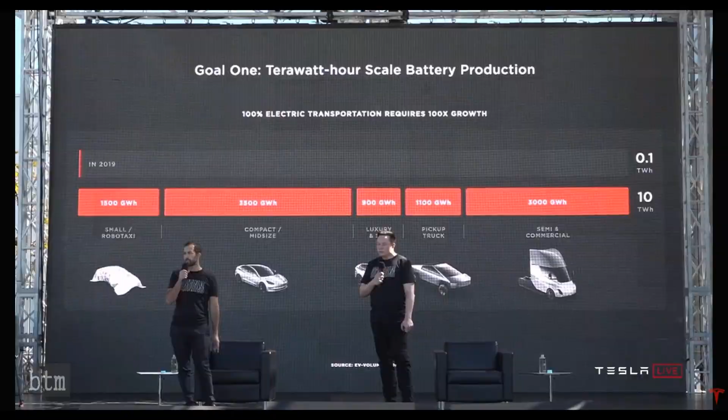You can see we're talking about 100x growth in batteries for electric vehicles to achieve this mission. And we are going to get there - it's just a matter of how fast, and our intention is to accelerate it.

You basically need on the order of roughly 10 terawatt hours a year of battery production to transition the global fleet of vehicles to electric. And the average vehicle lasts 15 years, so we're talking about 150 terawatt hours, give or take, to transition all vehicles of all types to electric. So it's a lot of batteries, basically.

Then on the grid side, we have a similar mountain to climb - 1,600 times growth from today's grid batteries to go 100% renewable on the grid and to take all of the existing fossil fuel heating uses in homes and businesses 100% electric.

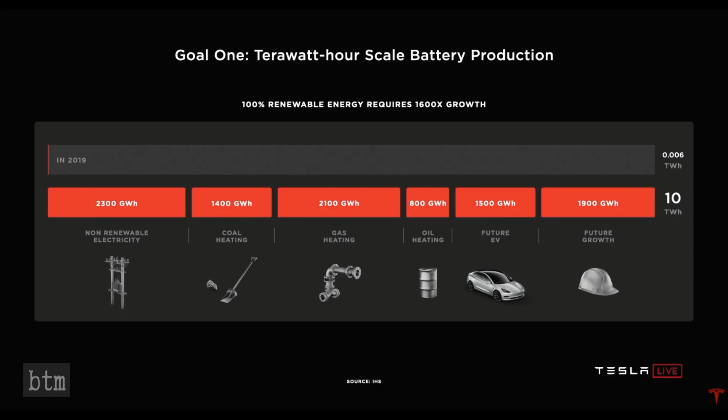This number, I think, might grow even more, as the world economy matures and as countries with high populations industrialize - we could see this number be even more. But let's say it's roughly 20 to 25 terawatt hours per year, sustained for 15 to 25 years, to transition the world to renewable. This is a lot.

So today's batteries cannot scale fast enough. They're just too small. For Giga Nevada, 150 gigawatt hours per year is probably what we expect to make out of there, but this is really pretty small in the grand scheme of things - that's only 0.15 terawatt hours.

And they cost too much. We would need 135 fully built out Nevada gigafactories to achieve 20 terawatt hours a year. It's not scalable enough of a solution. We need a dramatic rethink of the cell manufacturing system to scale as fast as we can and should.

And I think we should view this as more than just a question of money. Money is sort of like an ethereal thing, but it's really the amount of effort.

You have a certain amount of effort, in terms of people and machines, and depending on how efficient that effort is, for a given amount of effort, you want the most amount of batteries. It's not just a question of if we had $2 trillion, tomorrow you could make this. It's not that easy. You actually need to organize a massive number of people, build a lot of machines, build the machines that make the machines, and it's incredibly important to have that effort yield the most number of batteries.

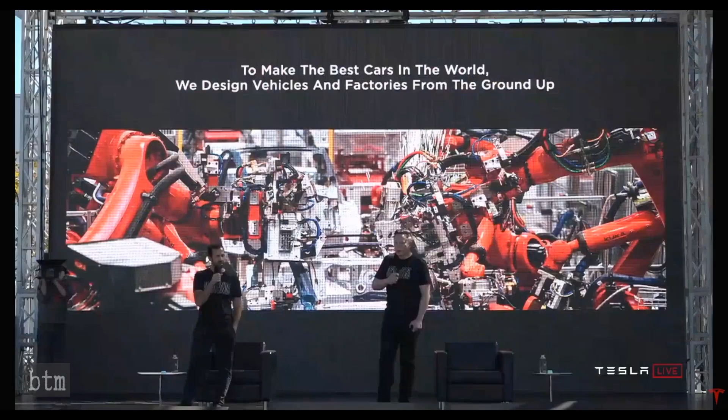To make the best cars in the world, we design vehicles and factories from the ground up. And now we do this for batteries as well.

It's weird, the slides don't show up quite right. Anyway, what shows up on the screen is not quite what shows up there. Oh, okay, it's different. I think it's because that's, yeah. No, that one's current, supposed to be current. Anyway, so let's get started.

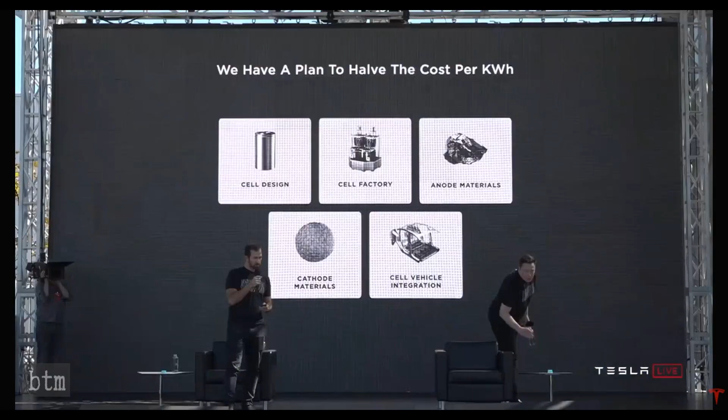We have a plan to halve the cost per kilowatt hour. And it's not a plan that rests on a single innovation, some research project that'll never see the light of day. It's a plan that has taken creative engineering and industrialization across every facet of what makes a cell into a battery pack, from raw material to the finished thing. We're going to go through that plan with you today, step by step, and build up how we get to these goals and how we accelerate this transition and make our vehicles and our grid batteries more affordable.

We basically thought through every element of the battery, well, almost every element. There are a few more elements that we won't get to today, but we will get to in the future. So first, before we get too far into it, let's talk about what is in a battery cell.

We've got the cap and the can, negative and positive terminals of the cell. When you open that cell, you've got a tab connected to those terminals, what we call the jelly roll, which is the wound electrodes on the inside. You can actually see what this looks like as you unwind it. This is over 1 meter long in a typical 2170 cell. So it's quite a long winding process. And you can see the tab still there.

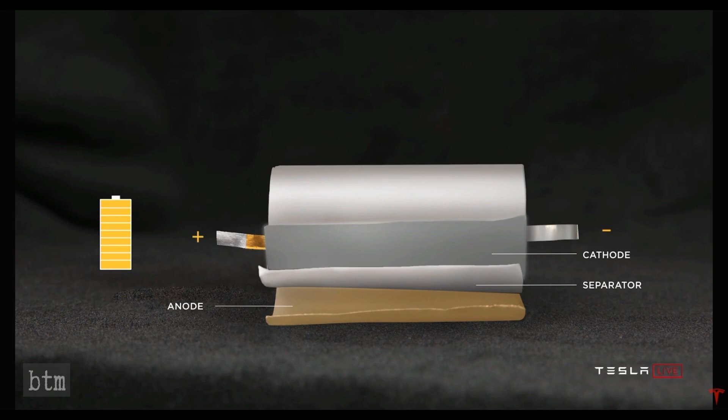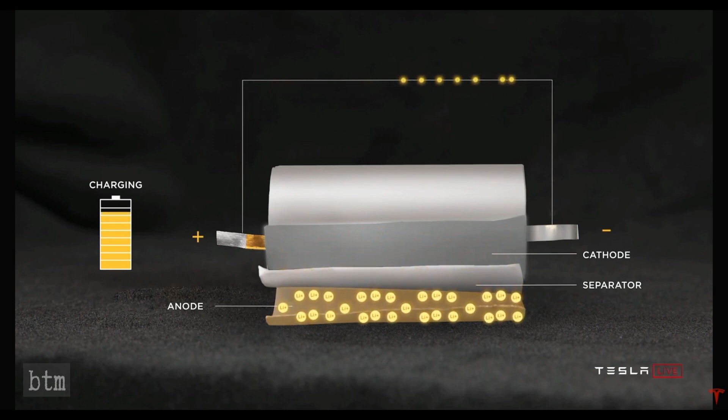To explain what's actually going on here, we've identified anode, cathode, separator, positive and negative terminal. Watch what happens as we discharge the cell: lithium moving from anode to cathode, and then the reverse. When we charge the cell, lithium moves from cathode to anode across the separator. This is the basic mechanism of all lithium-ion batteries, no matter what the form factor is.

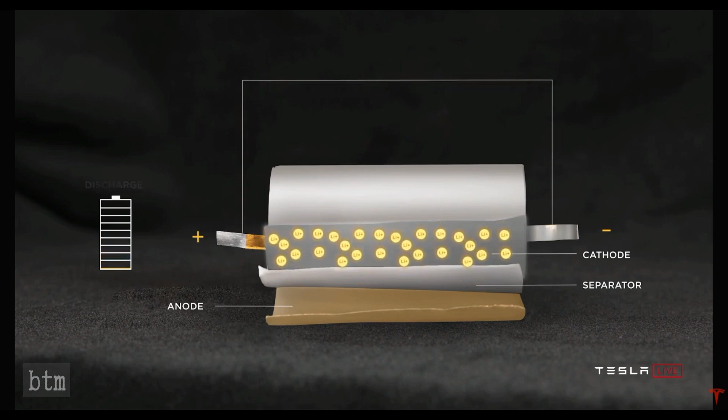When we look at what's happened to date, at least in our products, we've moved from the 18650 form factor to the 2170 form factor through great collaboration with our partners, Panasonic, new partners like LG and CATL, and probably others in the future.

A slight note on why it's called the 18650, although not on the slide, versus the 2170: the first two digits refer to the diameter, and the second two digits refer to the length. That helps explain what's up with these weird numbers. But nobody could explain to me why there was an extra zero. So we're deleting the zero that nobody can explain in future form factors. Technically it's the 18650, but going forward it's the 2170 because we just got rid of the extra zero since it's pointless.

And this was an evolutionary step, going from 1865 to 2170, bringing 50% more energy into the cell.

But when we look at the ideal cell design, if we were to do it ourselves, we need to go beyond just what's in front of us and study the full spectrum of options. So we swept the key figures of merit, how much we can reduce cost, and how much vehicle range increases as we change the outer diameter of the cell. We found a sweet spot somewhere around 46 millimeters.

But it's not just about a bigger form factor. Like anybody could make a bigger form factor. Any fool could make a bigger form factor. We're not any fool. Yeah, exactly.

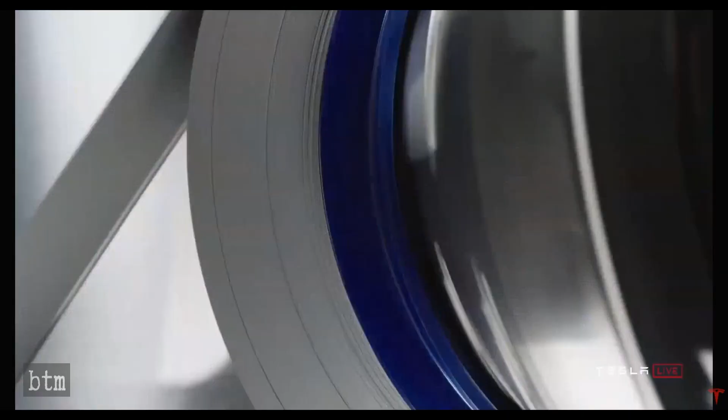It's a video of some of what's going on in the plant.

It will take about a year to reach the 10 gigawatt hour capacity. This is important to appreciate - when you build a factory, there's a certain capacity you design to, and it takes time to actually achieve that capacity. So probably about a year before we get to the 10 gigawatt hour annualized rate with the pilot plant. And this is just a pilot plant - the actual production plants will be more on the order of maybe 200 gigawatt hours, maybe more over time.

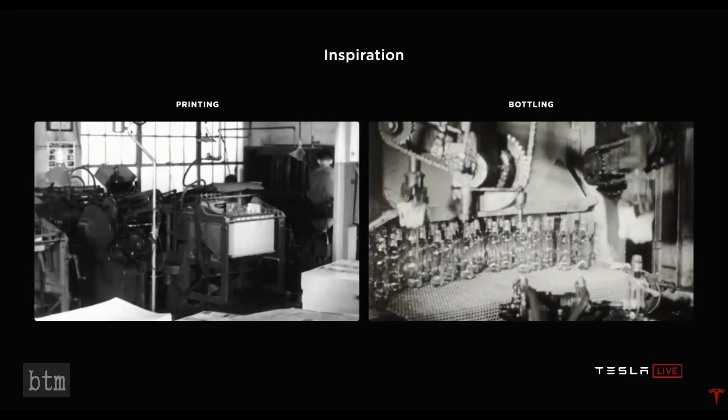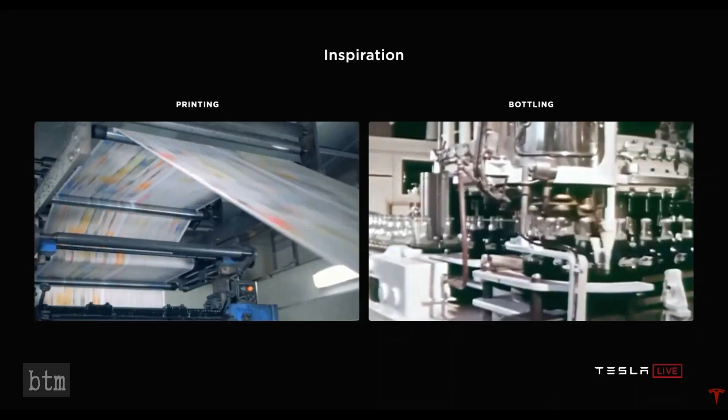When thinking about the ideal cell factory, we have inspirations in the paper and bottling industry, where from humble beginnings, over a century of innovation has enabled mass scale, continuous motion, unbelievably low manufacturing cost. The lithium-ion industry is really only in its 3rd decade of high-volume production - it has so far to go to achieve similar scale and simplicity. That was the inspiration we set out to the team as we thought about how to marry cell design and manufacturing in the best possible factory.

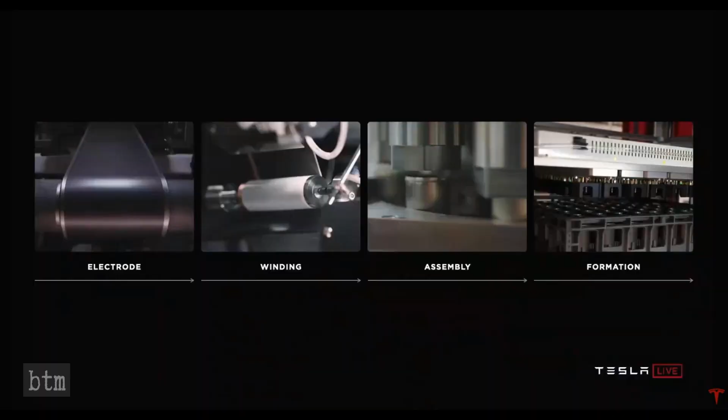Let's talk about what's in a cell factory. First, there's an electrode process where active materials are coated into films onto foils. Then those coated foils are wound in the winding process we just talked about, where if you have tabs, you have to start and stop a lot. Then the jelly roll is assembled into the can, sealed, filled with electrolyte, and sent to formation, where the cell is charged for the first time, where the electrochemistry is set and the quality of the cell is verified. We set out at every step of this process to think about how to make those processes fundamentally better and more scalable.

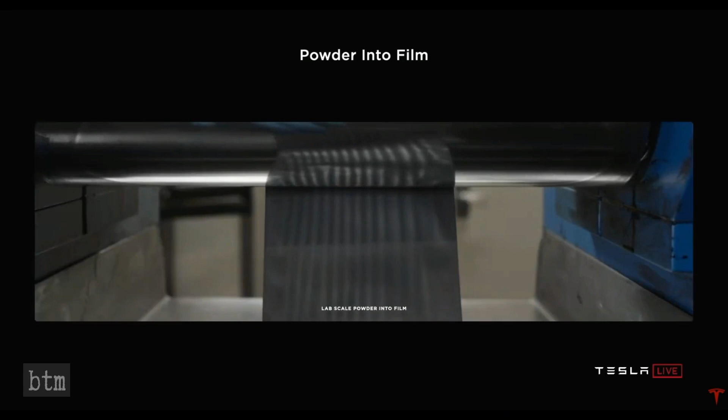I mean, it's hard, actually, to be clear. If this was easy, everyone would do it. So it's not like dry coating electrode is actually easy - it's actually very hard to do what appears to be a simple thing.

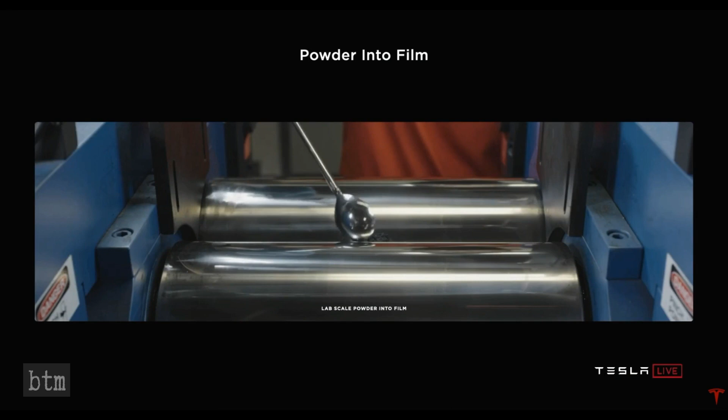It's worth noting we did acquire Maxwell a little over a year ago. It's certainly a good company, but the dry coating they had was sort of, I would call, proof of concept. Since the acquisition, we've actually revved the machine that does the dry coating 4 times - so we're in revision 4 post-acquisition, and there's still a lot of work to do. I would not say this is completely in the bag.

It's still a lot of work to do, and as you go from benchtop to lab to pilot to volume production, there are actually major issues that you encounter at every level. It's not like you make something work on your bench and bingo, now you can make a bazillion of it. Absolutely - it's insanely difficult to scale up.

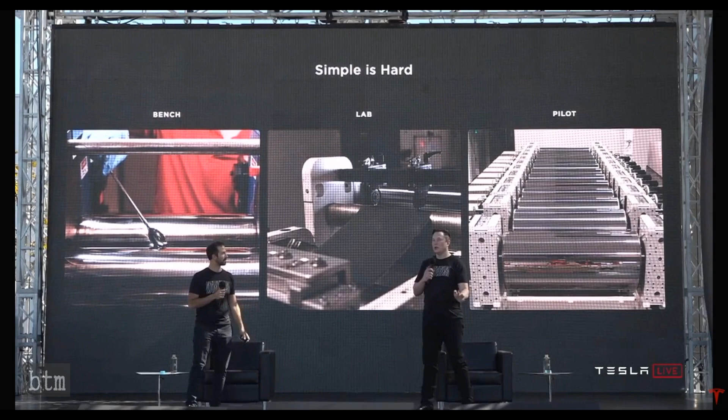But as Elon was saying, simple is hard. I mean, to be clear, I would like to not say that right now it's just totally working. It's close to working, but even now at the pilot plant level, it's not quite there. Well, it's fair to say it does work, but with not a high yield.

So we're still ironing out the kinks, but we've made tens of thousands of cells, thousands of kilometers of electrode. We're on the 4th generation of the equipment, so we've learned a lot along the way. It's super demanding because every atom has its place if you want to deliver the energy density, the cycle life, and the supercharging. But we're confident we'll get there, though it will be a lot of work along the way. There's a clear path to success, but a ton of work between here and there.

So, but this is a really profound improvement. Again, for people that know battery manufacturing, this is gigantic. We'll probably be on machine revision 6 or 7 by the time we do large-scale production. The rate at which the machines are being improved is extremely rapid, literally every 3 or 4 months is a new rev. And beyond the electrode, we continue to innovate on every other process step.

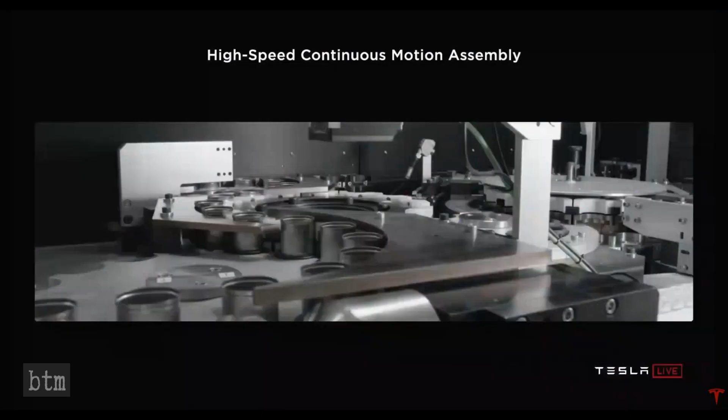So let's talk a little bit about assembly, which is next. The key to a high-performing assembly line is accomplishing processes while in continuous motion, thinking of the line as a highway: max velocity down the highway, no start and stop, no city driving. Exactly, no stoplights or traffic lights or anything. You want the highway. I want the highway.

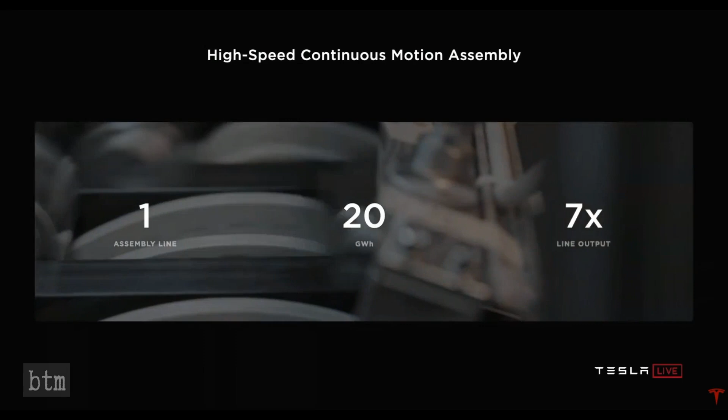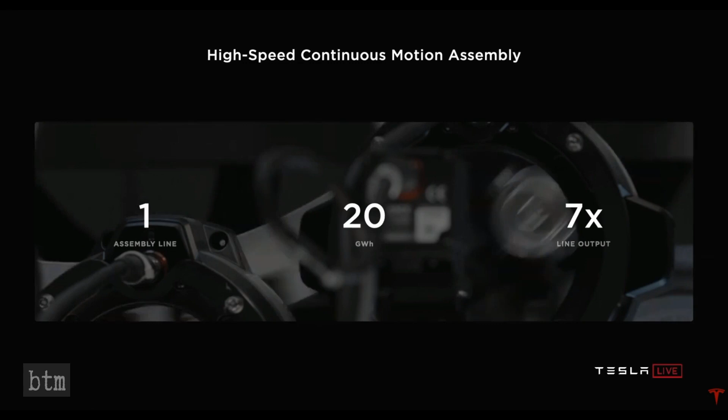Together with our internal design team that makes and designs this equipment, we coupled thinking about how to make the best cell with thinking about how to make the best equipment, so we could accomplish the fastest parts per minute rates on all these tools. Through that development, we got to the point where we can implement assembly lines: one line, 20 gigawatt hours, a 7 times increase in output per line. When you're thinking about scalability and pure effort, having one line be 7x the capability is just effort multiplying.

You can think about the fundamental physics of a factory. It's actually quite a lot like the rocket equation, where you've got your exhaust velocity and then the log of the start to end masses. So it's basically saying, how fast are things going, and what percentage of the factory volume is doing useful work. Conveyance does not count as useful work.

Only the value-added steps count. If you break the factory down into cubic meter sections, or smaller, say 1 liter sections, and ask, is a majority of this volume doing useful work, you'd be astounded at how bad most factories are. They're like maybe 2 or 3%, including our factory in Fremont. I think it's possible to get to at least 10 times that volumetric efficiency, more like 30% ish, maybe more, so the factory can be 10 times smaller.

And then the other thing is how fast things are going through the factory. It's like speed and density. The faster you go, a factory moving at twice the speed of another is equivalent to two factories basically. The company that will be successful is the one that with one factory can accomplish what other companies take 2, 3, or 4 factories to do. So what we're trying to do here is say, how do we, with one factory, achieve what maybe 5 or even 10 factories would normally be required to achieve?

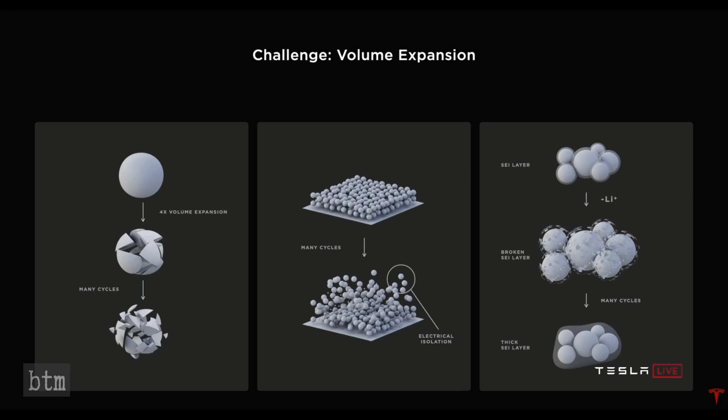The main reason is because the challenge with silicon is that it expands 4x when fully charged with lithium. And basically, all of that expansion stress on the particles starts cracking them. They start electrically isolating, you lose capacity, and the energy retention of the battery starts to fade. It also gums up with a passivation layer that has to keep reforming as the particles expand. Basically, with silicon, the cookie crumbles and gets gooey. That's basically what happens. Good analogy.

Current approaches to solve this, which exist - I mean, we have silicon in the cars you're all in right now - involve highly engineered, expensive materials in the scheme of things. Now, they're still great, and they enable some of the benefits of silicon, they just don't enable all of it, and they're not scalable enough. You can see some of the things you may have heard of, SiO, silicon with carbon, or silicon nanowires. That's kind of the space right now.

What we're proposing is a step change in capability and a step change in cost. And what that really is, is to just go to the raw metallurgical silicon itself. Don't engineer the base metal. Just start with that and design for it to expand in how you think of the particle in the electrode design and how you coat it.

Basically, $1 per kilowatt hour. If you use simple silicon, it's dramatically less than even the silicon that is currently used in batteries made today, and you can use a lot more of it. The anode would cost, with this silicon, $1.20 a kilowatt hour.

And how does it work? Start with raw metallurgical silicon, stabilize the surface with an elastic ion conducting polymer coating that is applied through a very scalable approach - no chemical vapor deposition, no highly engineered high capex solutions - and then integrate it into the electrode through a robust network formed out of a highly elastic binder. In the end, by leveraging this silicon to its potential, we can increase the range of our vehicles by an additional 20%, just from this improvement.

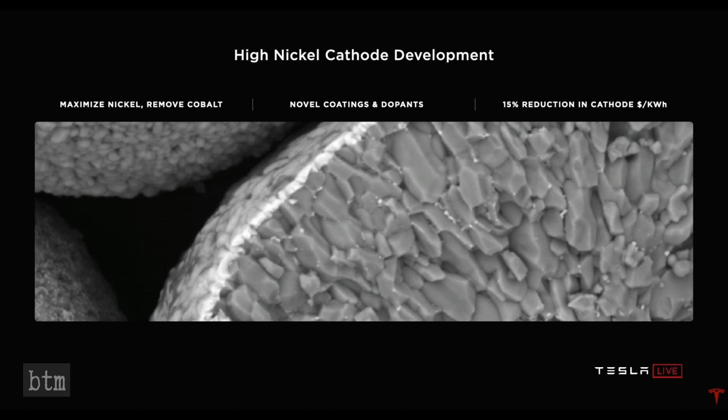But it's not just about nickel. In order to scale, we really need to make sure that we're not constrained by total nickel availability. I actually spoke with the CEOs of the biggest mining companies in the world and said, please make more nickel, it's very important. And so I think they are going to make more nickel.

But there's also, I think we need to have a kind of a 3-tiered approach to batteries. Starting with iron, that's kind of like medium range, then nickel manganese as sort of a medium-plus intermediate, and then high nickel for long range applications like Cybertruck and the semi. Something like a semi truck, it's extremely important to have high energy density in order to get long range.

Just to give iron a bit more time - although if you look at the watt-hours per kilogram at the cathode level, iron looks like nickel's twice as good. But when fully considered at the pack level, everything else taken into account, nickel is about maybe 50 or 60% better than iron. So iron is a little better than it would seem when you look at it at the pack level fully considered - it's not as good as nickel, nickel is like 50 to 60% better, but it's actually pretty good, and good for stationary storage and medium range applications where energy density is not paramount.

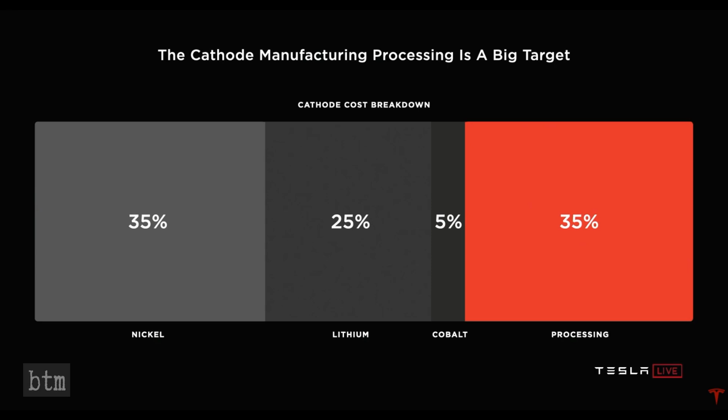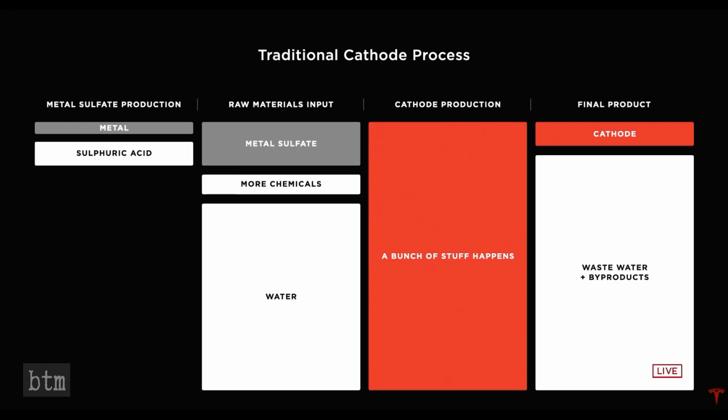It's insanely complicated. If you look at the total journey, like it's a small world journey of 'I am a nickel atom, what happens to me,' it's crazy. You're going around the world 3 times. There's like the moral equivalent of digging the ditch, filling the ditch, and digging the ditch again.

It's total madness, basically. These things just grew up as legacy processes, how it was done before, and then they connected the dots but really didn't think of the whole thing from a first principles standpoint, saying how do we get from the nickel ore in the ground to the finished nickel product for a battery. So we've looked at the entire value chain and said, how can we make this as simple as possible? That's what we're proposing here with our process.

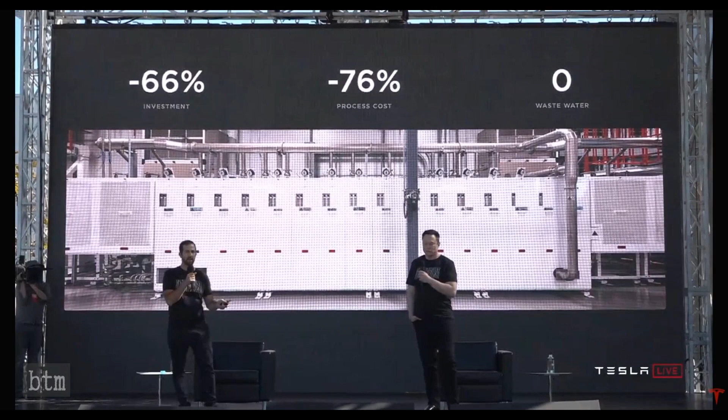As you can see, a whole lot less is going on here. We get rid of the intermediate metal sulfate, final product cathode, and recirculate the water, no wastewater at all. When you summarize all of that, it's a 66% reduction in CapEx investment, a 76% reduction in process cost, and zero wastewater. Much more scalable solution.

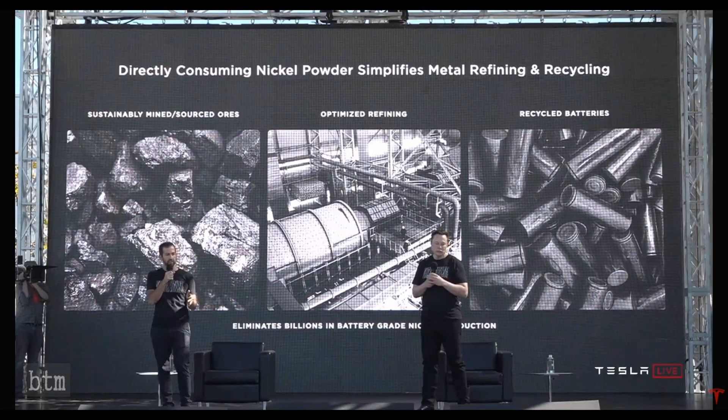When you think about the fact that now we're actually just directly consuming the raw metal nickel powder, it dramatically simplifies the metal refining part of the whole process. So we can eliminate billions in battery-grade nickel intermediate production. It's not needed at all.

We can also use that same process we showed on the previous page to directly consume the metal powder coming out of recycled electric vehicle and grid storage batteries. So this process enables both simpler mining and simpler recycling.

Now that we have this process, we're going to go and start building our own cathode facility in North America, leveraging all of the North American resources that exist for nickel and lithium. Just doing that, just localizing our cathode supply chain and production, we can reduce miles traveled by all the materials that end up in the cathode by 80%, which is huge for cost.

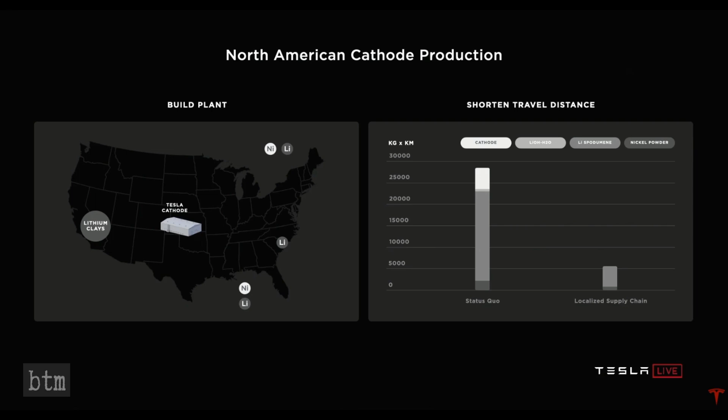To be clear, cathode production would be part of the Tesla cell production plant. So it would basically be raw materials coming from the mine, and out comes a battery. And on that note, the way the lithium ends up in the cell is through the cathode. So we should obviously do on-site lithium conversion as well, using a new process that we're going to pioneer. It's a sulfate-free process again, skip the intermediate: 33% reduction in lithium cost, 100% electric facility co-located with the cathode plant.

It's important to note that there is a massive amount of lithium on Earth. Lithium is not like oil, there's a massive amount of it pretty much everywhere. In fact, there's enough lithium in the United States to convert the entire United States fleet to electric — all the cars in the United States, about 300 million or so — every vehicle can be converted using only lithium that is available and already discovered in the United States today. People really haven't even been looking, because it's just widely available.

But it is important to ask, what is the smartest way to take the ore and extract the lithium in an environmentally friendly way? We looked at this from a first principles physics standpoint, instead of just doing it the way it's always been done, and we found that we can actually use table salt, sodium chloride, to basically extract the lithium from the ore.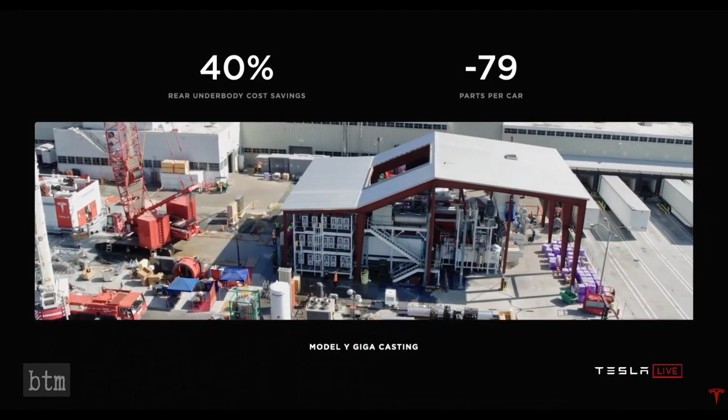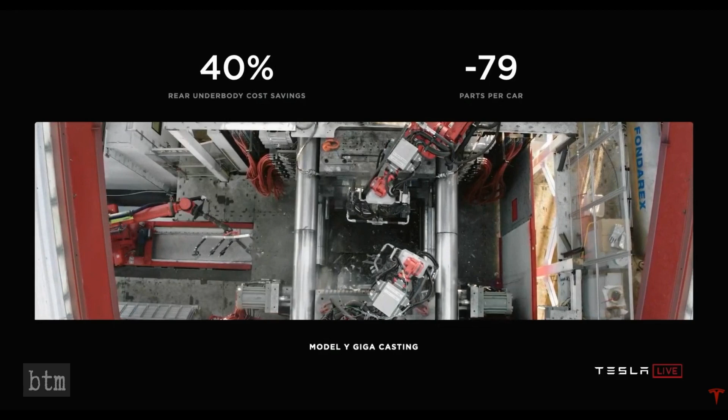It starts with having a single piece casting for the front body and the rear body. In order to do this, we commissioned the largest casting machine that has ever been made, and it's currently working just over the road at our Fremont plant. It's pretty sweet.

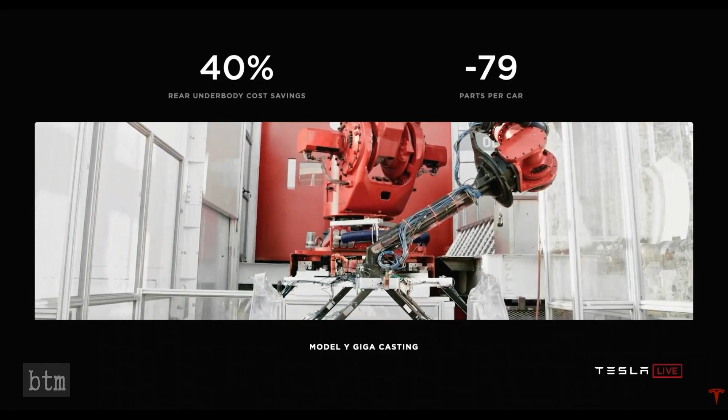We're currently making the entire rear section of the car as a single piece, high pressure die cast aluminum. In order to do this, we actually had to develop our own alloy, because we wanted a high strength casting alloy that did not require coatings or heat treatment.

This is a big deal for castings, especially a large casting. If you heat treat it afterwards, it tends to deform — it kind of does this potato chip thing — so it's very hard to keep a large casting in shape. There was no alloy that existed that could do this, so we developed our own special alloy of aluminum that has high strength without heat treat and is very castable. That's a great achievement of our materials team.

In fact, in general, we've got a lot of advanced materials coming for Tesla — new alloys and materials that have never existed before.

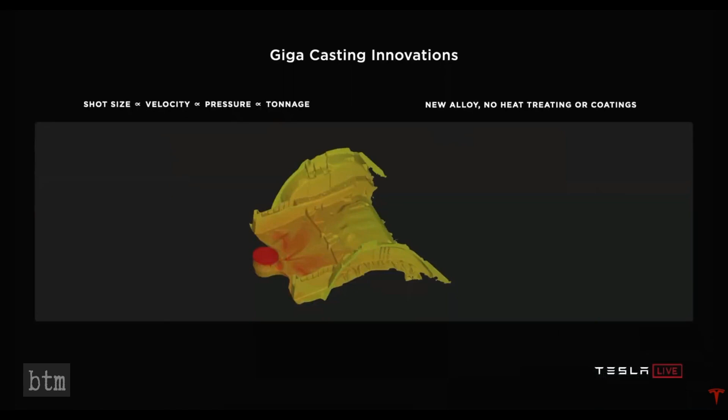So you're basically making the front and rear of the car as a single piece, and then that interfaces to what we call the structural battery, where the battery for the first time will have dual use. The battery will both have the use as an energy device and as structure.

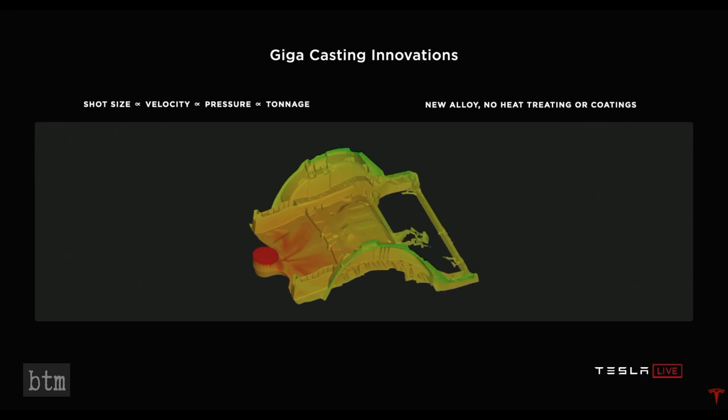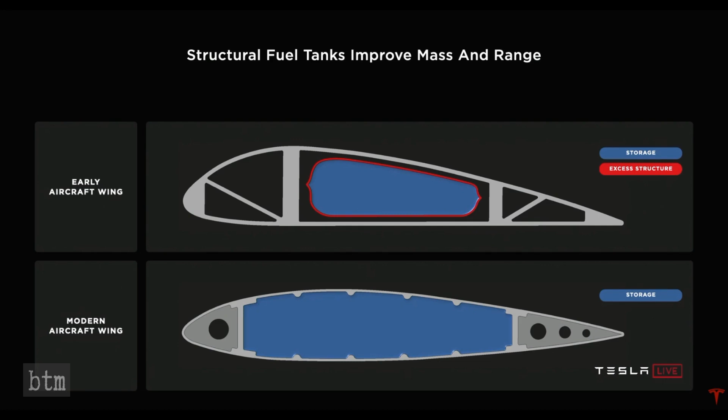This is absolutely the way things are done. In the early days of aircraft, they would carry the fuel tanks as cargo, and the fuel tanks were quite difficult to carry. They were basically worse than cargo. You had to bolt them down. It was very difficult. Then somebody said, 'What if we just make the fuel tank in wing shape?' So all modern airplanes, the fuel tank, your wing is just a fuel tank in wing shape. This is absolutely the way to do it. The fuel tank serves as dual structure, and it's no longer cargo. It's fundamental to the structure of the aircraft. This was a major breakthrough.

We're doing the same for cars. This is really quite profound. Effectively, the non-cell portion of the battery has negative mass. So we save so much mass in the rest of the vehicle—more mass in the rest of the vehicle than the non-cell portion of the battery.

So it's like, how do you really minimize the mass of a battery? Make it negative. Make the non-cell portion of the battery pack negative. It also allows us to pack the cells more densely because we do not have intermediate structure in the battery pack. Instead of having supports, stabilizers, stringers, and structural elements in the battery, we now have a lot more space because the pack itself is structural.

What we do is, instead of having just a filler that is a flame retardant, which is currently what's in the 3 and Y battery packs, we have a filler that is a structural adhesive as well as flame retardant. So it effectively glues the cells to the top and bottom sheet, and this allows you to do shear transfer between the upper and lower sheet.

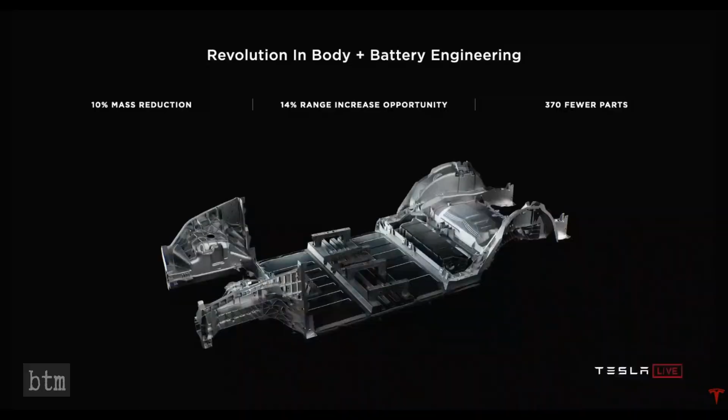Like I said, 10% mass reduction in the body of the car, 14% range increase, and 370 fewer parts.

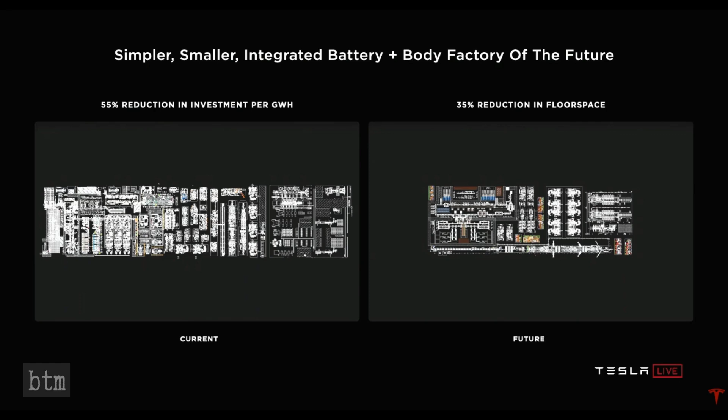I really think that long term, any cars that do not take this architecture will not be competitive. And it's not just at the product level a better product, but in the factory it's a massive simplification. You saw the part removal, the casting machines, the structural battery pack. We're looking at over 50% reduction in investment per gigawatt hour, 35% reduction in floor space, and we'll continue to improve that as we make the vehicle factory of the future.

So it's major improvements on all fronts, from the cell all the way to the vehicle. In addition to enabling additional range and improving the structural performance of the vehicle, it is worth another 7% dollar per kilowatt hour reduction at the battery pack level, bringing our total reductions now to 56% dollars per kilowatt hour.

So stacking it up, we're not just talking about cost or range, we've got to look at all the facets. Range increase: we're unlocking up to 54% increase in range for our vehicles and energy density for our energy products. 56% reduction in dollars per kilowatt hour at the battery pack level, and a 69% reduction in investment per gigawatt hour, which is the true enabler when we talk about how we achieve this scale problem.